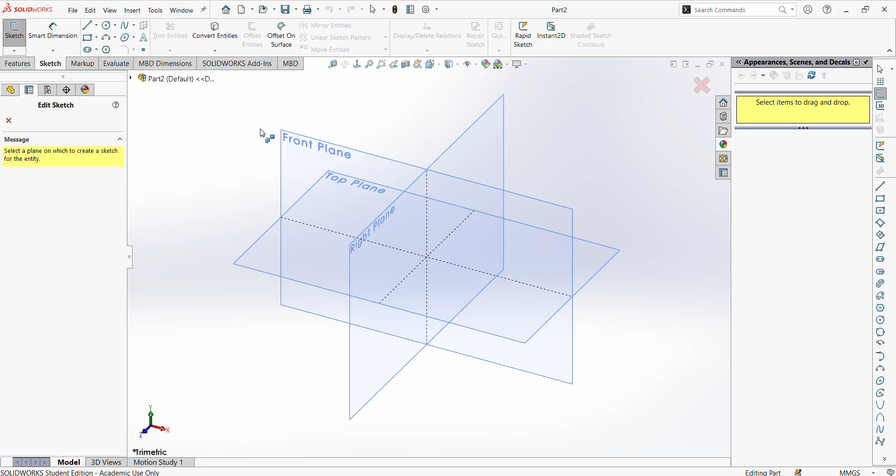So let's pop over - we can do part, millimeters, sketch, let's hit that right plane, and like we said, it's not coincident to the origin.

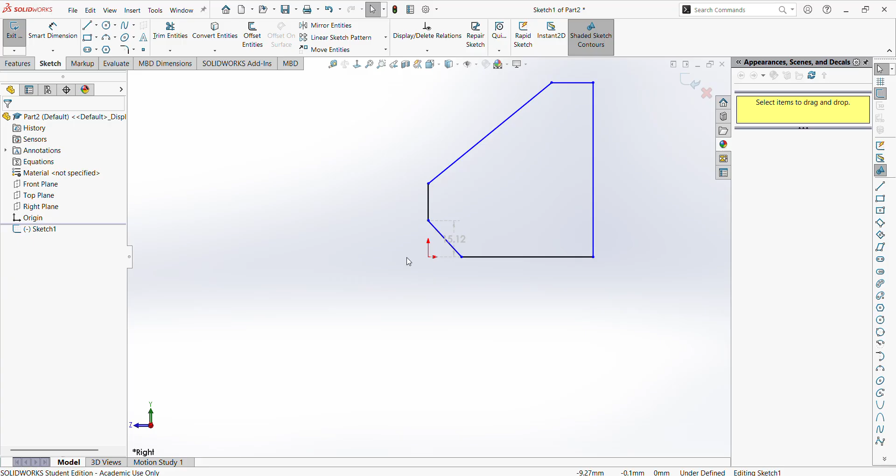We do know it's kind of like this shape though, if I'm remembering right. I think it came over a little bit, then came down. Yeah, I didn't connect those - control click, coincident, or trim the line and redraw it however you want. So with this one, let's hit these 2 - they should be vertical, and this one should be horizontal. Now that puts these dots at our origin, but it doesn't tell us how far.

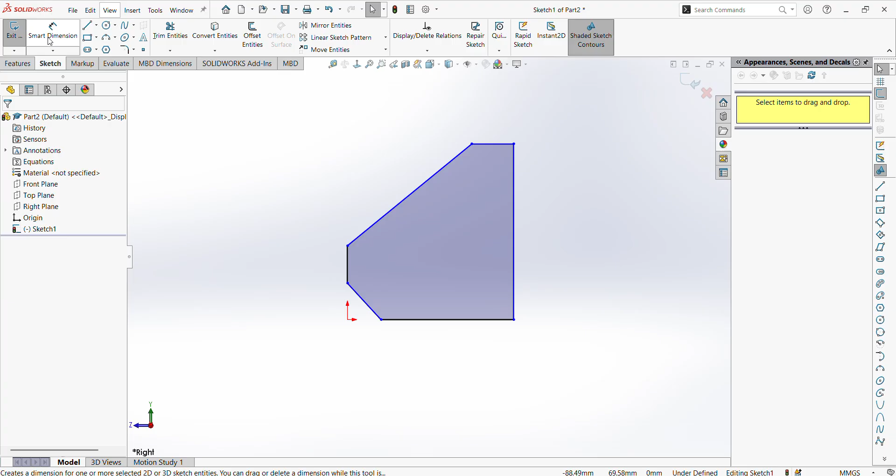Let's look at the drawing and figure out what we need. Let's go to the big dimensions first, 75, 100. But that's technically not correct. We need - no, that is 75 and 100. Yes, because both of those are 100. So I kind of double-looked at that line if you were seeing what I was seeing. Okay, so we know this is 100. And I saw this was 80. And then this was 75. Cool.

75, 80, 100. Technically, I think it's this one - yeah, because it's the height, and this is the length, and we haven't done length. So now we need 35 tall here, a 45 degree, and that should give this distance, I believe. That should fully define all those parts, and then doing that angle should fully define the rest of it.

So let's add those 2 angles in. We said from here to this, 45. Yep, and that fully defines it. I think we've talked about that in a previous video.

Oh, and you can see an error I've made here. Let's cut this - this comes down to like here. It's more like that, right? Because we have to add a dimension to that shelf.

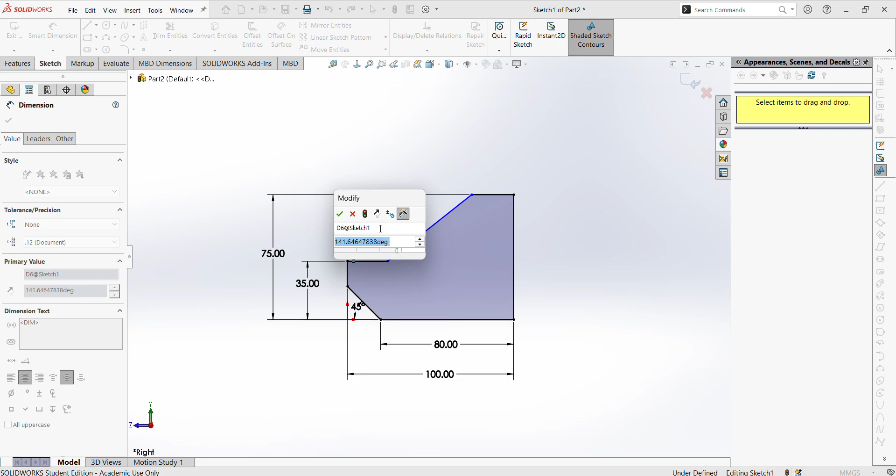And now the only thing we're really missing is this angle, and I think we are - well, it's not going to fully define it because we don't know the length. And I know what my brain was thinking when I did that, so I can tell you. And oh, not that.

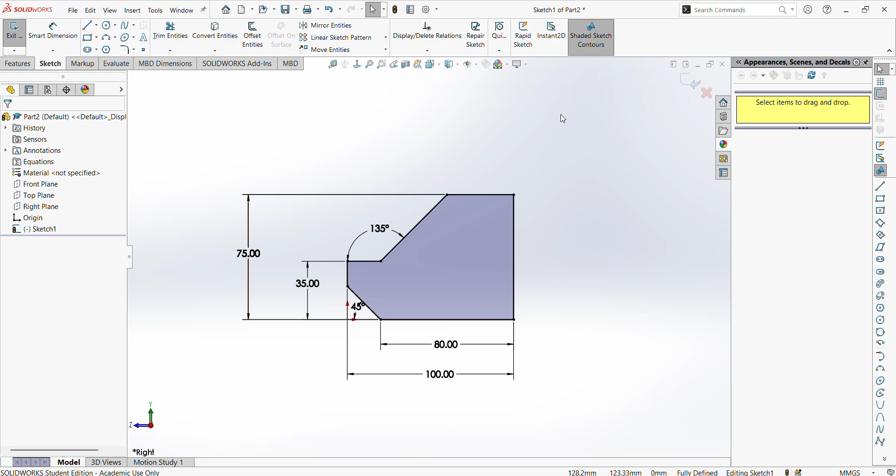It's going to show you in this image what we're kind of seeing, right? This is definitely vertical, and if it was off by a couple millimeters or so, they would put that dimension in, or I would. So when a dimension isn't in like that, you can, like I've mentioned before, make some assumptions. In class and in drawings I've seen from places, they won't make you make any assumptions - they'll give you everything. So when I say that, assume it's a rarity and you're not seeing what you should be seeing, to be honest.

But in parts I've seen online and parts I've done myself, and just random stuff I've designed to practice, I have noticed that they'll do stuff like that where you might need to make an assumption based on what it looks like. And if it looks vertical, and it is, well, add the vertical and then check the weight and see if you're on.

All right, like we said, this is going to be the easiest way to get this generalized shape, and it was, right? And that looks pretty good compared to our ISO. We just need to make that one cutout.

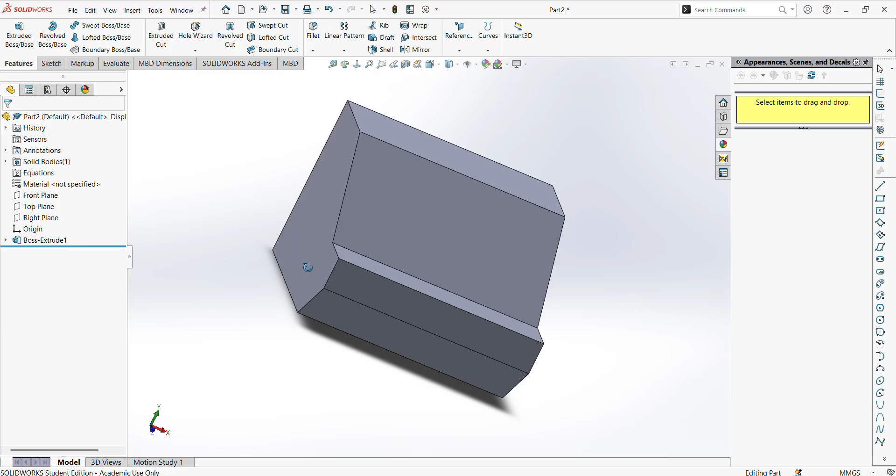And the beauty of how we've made this, and what we've talked about with some other sketches, you can sketch on this outside plane, and then you could draw the triangle that we're going to need to cut, and we could offset the cut into the part, and then begin our cut to the length of the cut.

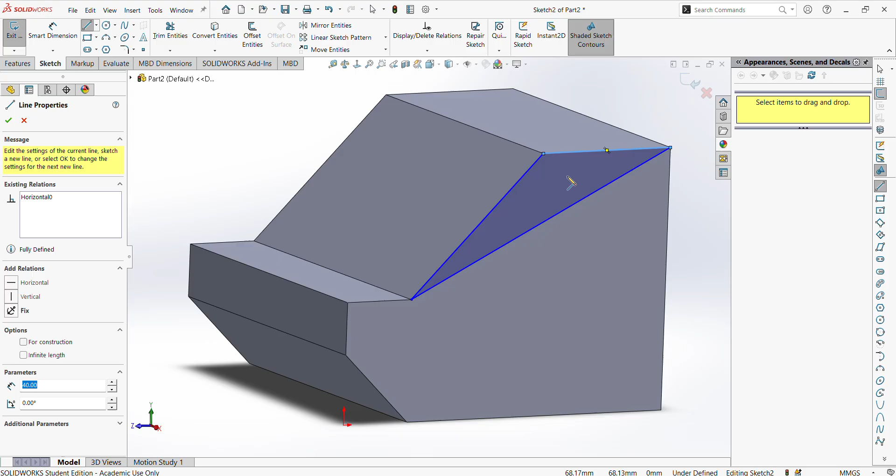That already sounds complicated. Now, I'm going to show you that really fast just because I talked about it and it seems like something we could do. But it's not a tool in our tool belt that we're really going to want, right? And there's also another tool I could have used right there, but we're going to talk about that when I want to talk about it.

So, like I mentioned, we could offset this cut. Offset. And I think it's 25. It's offset that way. And then the cut we already talked about was 50. So we could make that cut that way. There's multiple ways to skin a cat, so they say. Bad phrase, but legitimately there's multiple ways to build any of these parts, and learning how to build them the fastest and the smartest is really what's going to make you the best designer and best engineer possible.

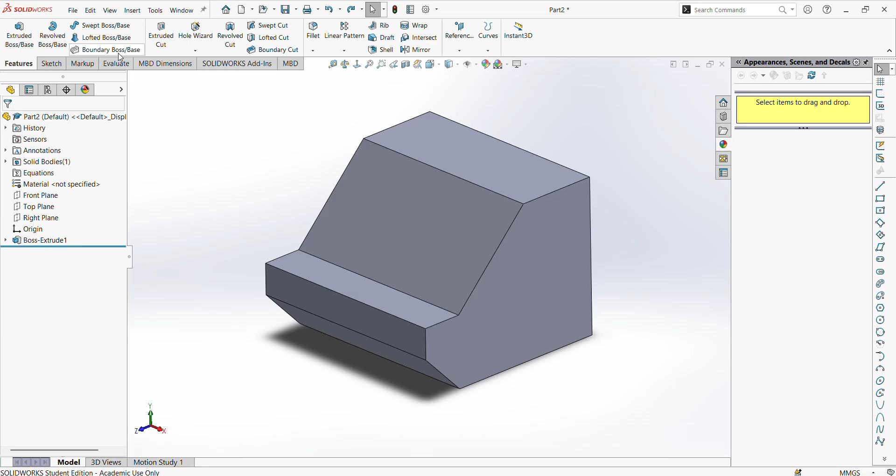And that was one thing that did frustrate me in my classes, because the teacher did say in the very beginning of the class that all these parts could be designed. Sorry, I'm talking about something else. Let me finish this train of thought and then we'll continue. He didn't really get into showing you what the fastest ways were often. He assumed that with the tools you had in your belt, you would apply those faster ways. But some people need to be shown how to do diff EQ or long form equations. They can't just see it and take things from their old math classes and go, oh, I can do this. So just because you have the tools in your belt doesn't mean you can complete the project.

Sometimes you need a master craftsman ahead of you showing you what they have seen and what they've done and what's easier. And I'm not going to say I'm a master craftsman or anything like that, but I do know some things that make things easier. And we're going to apply one of those here. So let's get back on topic and think about what we just did earlier. We sketched here. We clicked a bunch of buttons to offset that sketch, then to set the distance, then to cut it in at the right thing. A lot of clicks, right? So let's look at it this way.

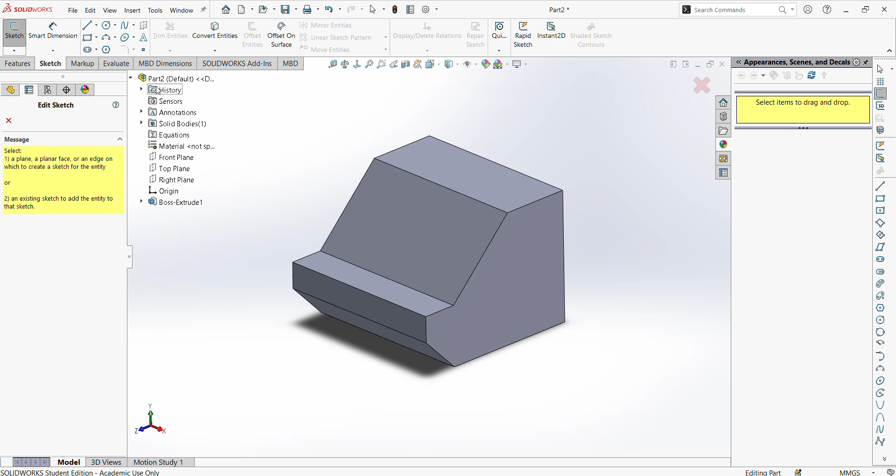We have this drop-down menu. When we sketch, it wants to know what we're going to sketch. We clicked here before we could click anywhere. But let's click here, bring the drop-downs. Let's choose that same plane that we started on in the very beginning. Now, I know this looks exactly like what we just did, but it's not, and you'll see when I do this. See where that line is? It's on that center plane that we mid-planed from within the part.

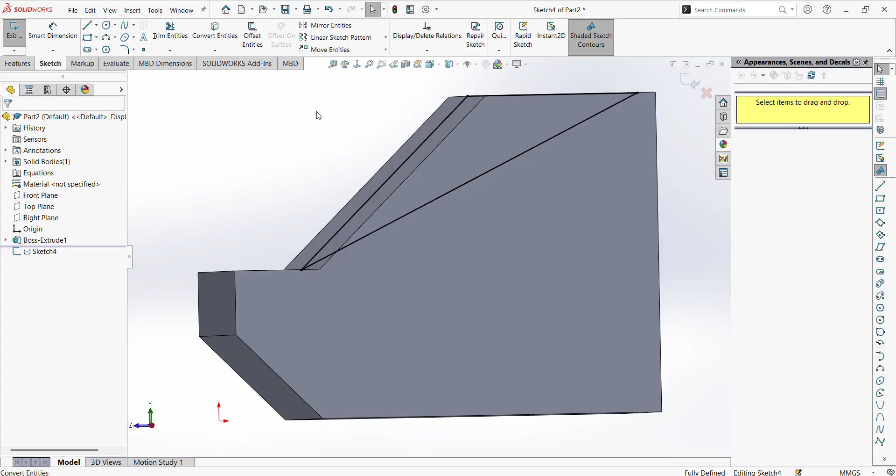So let's put another tool in the tool belt now. We have offset and convert entities. Offset we'll learn a little later, but it's very similar to convert. Essentially, it's going to convert entities that are already there, like these two edges, into your current sketch. So I've clicked them, I've added them. Now we've converted them into the sketch. And you see how that fully defined it too? It's a really good tool. Our other one wasn't fully defined, if you remember. When I did that line there and then drew these over here and overlaid them, it wasn't fully defined. If I would have converted entities, it would have been, but we weren't showing that at that point, and this is what we want to show.

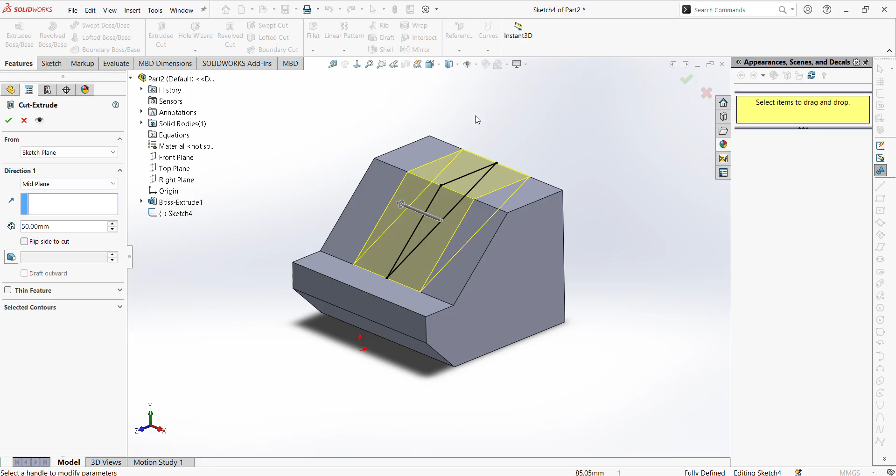So from here, let's get back on topic again. Let's think about what we're doing. We're extrude cutting, and it would be from mid plane because that was the last thing we had used, but I had shown you the other way. Look how simple that is. That's a lot less clicks, right? 1, 2, entering the value there, 3, setting the distance here, 4, versus just 1, entering the distance, right? Or I guess technically 2. 1, 2, setting the distance. So we cut out a few clicks in this method, and our sketch is fully defined using the convert entities tool.

All right, there's our tool. There's our part, and where's our origin? It's sitting out in free space. So cool. Easy part to design, really. Only 2 cuts, but a few things that we could talk about in there that make things easier. The convert entities tool, and picking which plane or surface to sketch on when we're thinking about the relation to our drawing.

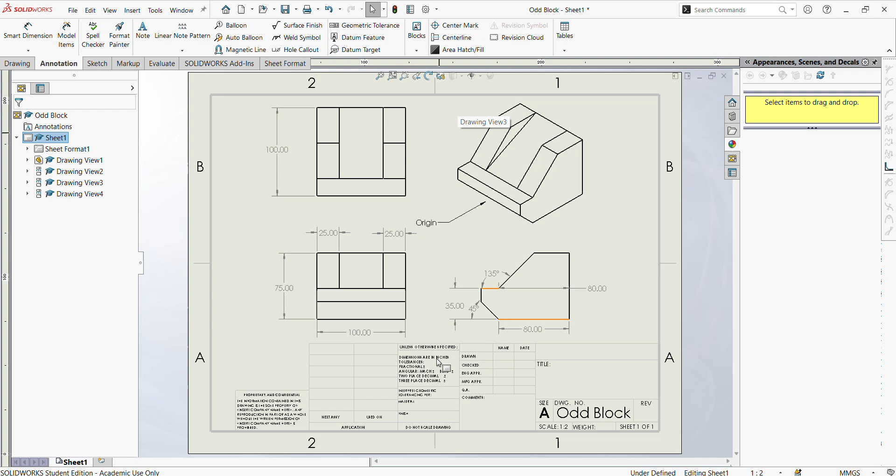So best practices, like we always end on: see the drawing, pause, try to make the part yourself with the tools you have in your belt. You might not have all the tools for this one, or it might be more difficult, but you could do it. Check the mass properties. If you fail, go back, watch the video, see what you messed up on, check again, see that you got it right, improve.